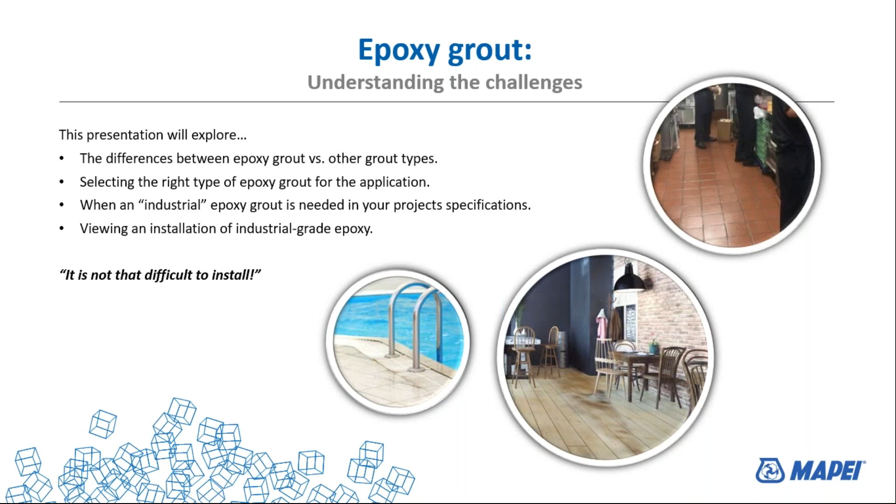And then finally, we're going to be viewing an actual installation of industrial grade epoxy grout, so that you can see it's not that difficult to put in, it's not that difficult to work with, and when it's needed on your job, it should be used on your project.

So let's take a look a little bit at grout itself. What's the purpose of grout? Grout is used primarily to be more sanitary, so we're filling up the joints between the tile, preventing dirt or contamination from getting in between the tiles. It's meant to keep water from going down into the tile installation and underneath the tile. Remember that grout is not waterproof. Even if it's an epoxy, it's not a waterproof grout. Moisture can still seep in through it, but it does help keep water out.

It protects the tile edges. If it's a square edge tile, you're filling up the grout joint completely so that you're not getting chips along the edges. If it's a cushioned edge tile, the grout is at a level where it drops down to the level of the cushion. But basically, it's protecting the edges of the tile.

Grout's used to either contrast or blend with the tile, depending upon the look that the designer is after. Do they want to accent the individual tiles, make them pop and show the difference in color, or do they want more of a monochromatic look and have the grout blend in? With the range of colors now available in grout, you can do either type of application.

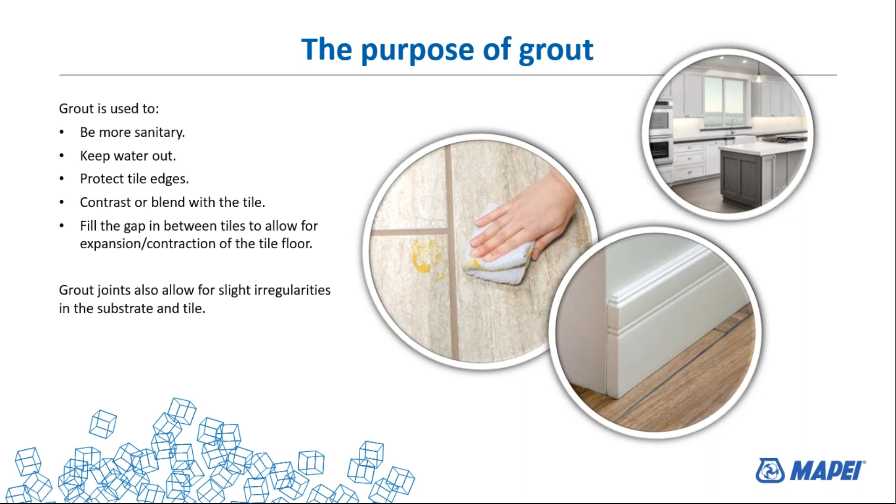It also fills in the gap between the tiles to allow for the expansion and contraction of the tile floor, picking up the movement in that floor. Grout also allows for slight irregularities in the substrate and the tile. So grout is used for correcting a lot of minor imperfections in an installation, hiding maybe some of the variations between the tiles. The grout serves a major purpose in the installation.

So when we're taking a look at types of grouts for ceramic tile, we reference back to the ANSI specifications. Your standard cement grouts meet ANSI 118.6. This is a blend of sand, cement, and aggregates brought together to form a uniform, consistent grout. When I first started in tile installation, a lot of the grout was job site mixed, where we would just take sand, cement, maybe add in some cement coloring and come up with a grout.

Then with the development of other additives into it, moisture retarders into it, it developed into your standard cement grout, which meets ANSI 118.6. In the last number of years, we've gotten into the ANSI specification 118.7, which is your high performance cement grouts. We'll get into a little more definition on these in just a minute, but they perform better than your traditional Portland cement grout. There's a lot of pros to these types of grouts and what they're doing.

Recently, what we've seen on the market is the premixed or ready-to-use grout. This is a type of grout that comes in a bucket. You open it up, it's ready to use. There's different mixtures of it, different ways of putting this type of grout together, which we'll explain in a few minutes. The biggest thing to realize is that currently there are no ANSI standards for these ready-to-use grouts. The industry is currently working on that, and I'm sure shortly we'll be seeing actual standards for these ready-to-use grouts. Industry is moving more and more to this type of a grout.

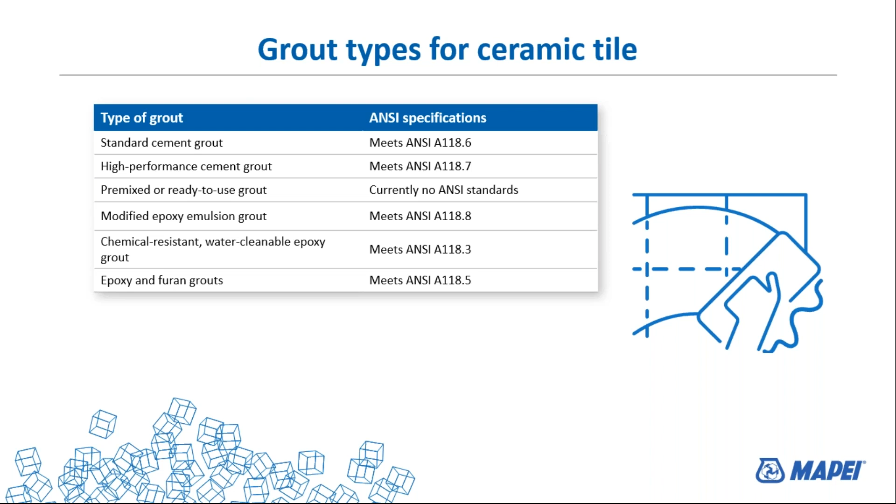So when we take a look at your basic cement grouts for ceramic tile or stone, your ANSI 118.6, the pros on this type of a grout is that it's cost competitive. It's the least expensive grout on the market. You do have a range of colors. Just with MAPEI, we have 40 different colors in this. Our competition has similar numbers of colors, but you find a full range of colors with these types of grouts. They're available both as sanded and unsanded.

Typically, you're going to use an unsanded grout where the joint is up to 1/8 of an inch in width. If it's more than that, we'll go into a sanded grout. Suitable for most applications, except when chemical resistance is needed. Getting into a chemical resistant application, this type of grout won't hold up to it.

The cons on this grout: it is a cement, and as a cement, it is susceptible to shading, discoloration. It can look different depending upon how much water was used to mix it, how much water was used to clean it up. It's very similar to when you take a look at your sidewalk. If you use too much water in a sidewalk mix, the color becomes different than if you're using the proper amounts of water. Similarly, with a Portland cement grout, you can have shading based on how much water is used in mixing and how much water is used in cleaning up.

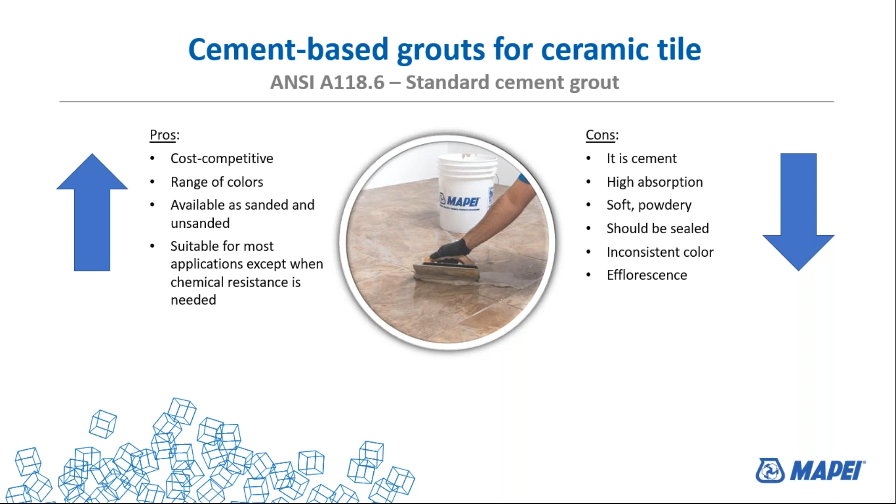The next grout is the ANSI 118.7 cement-based grouts for ceramic tile, or a high-performance cement grout. The pros on this are this is a non-Portland cement grout. It's a calcium aluminate cement. With a calcium aluminate cement, you're using less water, and that means there's less water to be hydrated off or evaporate out. So we end up with a faster setting grout, a denser grout. This grout is typically less than 5% of absorption or porosity.

The joint widths on this type of a grout can be as small as 1/16 of an inch, all the way up to an inch wide. So you're not using both an unsanded and sanded grout. It's one type of grout. So on the distribution side of it or the application side of it, less inventory to be carrying around with you in doing your installation. One bag can go either the tight joint or all the way up into a wider joint.

It is efflorescence resistant. Being a calcium aluminate cement, the way it hydrates out, you're not getting the free lime being pulled to the surface and leaving that white efflorescence residue on the surface of the tile. So when being asked for a recommendation on any type of an exterior application, this for sure is the grout that we would start with and recommend, making sure that you as an applicator, you as an architect, are not ending up with the efflorescence problem at the end of an installation.

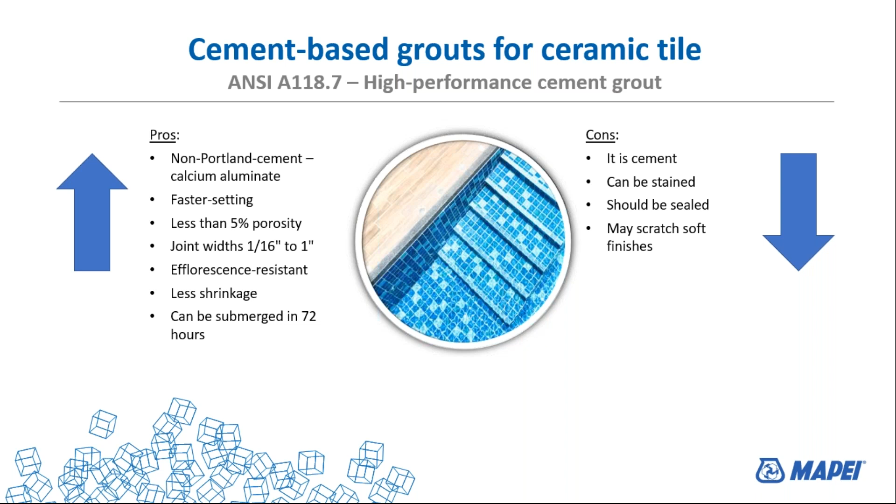And the aggregate on this type of a grout can scratch soft finishes. So if you're using a softer glass tile or a metal finish tile, always do a test area prior to installing this type of grout.

The pre-mixed polymer resin grout is a one-part liquid, ready-to-use grout that requires no mixing with water. The advantage to this is that you open up the bucket, you bring it out and start applying it right away. Cleans up with water. And the other advantage is that any extra on this grout can be put back into the bucket, resealed, and will last up to a year on the shelf.

Recently, I had an opportunity. I was cleaning out some stuff in the garage, and I had a bucket left over from better than a year ago of this type of grout. Opened it up and found that it was still completely usable, and it was over a year old. But we say a year shelf life after it's been opened.

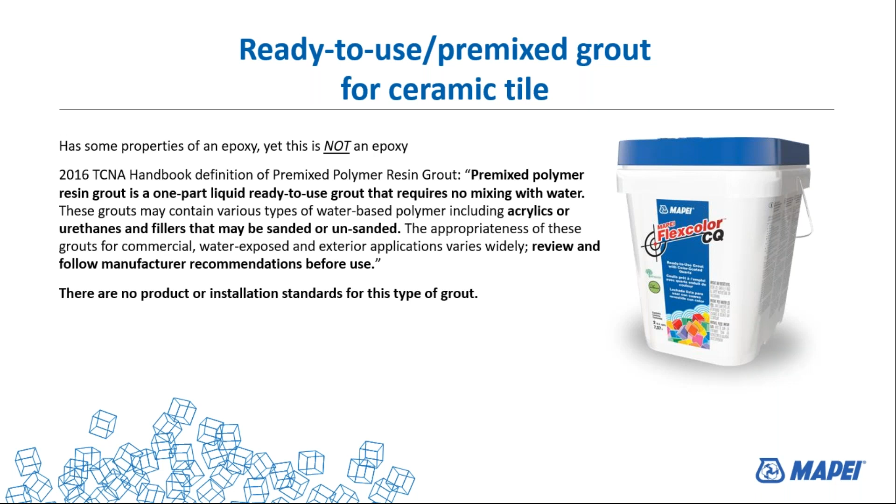We'll also remember that there are no installation standards or ANSI standards on this type of grout. So as a design professional, if you're looking at including this in your spec and you're looking for ANSI standards, at this point, not yet. Soon to come, though.

And we take a look at the pros on the ready to use. No mixing, so we can get it out of the bucket and start installing it right away. It's dust free, so you're not adding a bag of powder into water and spinning it and having dust going across the air. The container can be resealed. It will fill into joints from as small as 1/16 of an inch all the way up to 1/2 inch. Will produce no efflorescence because it doesn't have any cement in it.

It's flexible and crack resistant, and no sealing ever. The sealers just don't stick to it. The cons on this type of grout, it does have limited chemical resistance. So be careful that if you're looking for a grout for stronger chemical resistance, this is not the grout to be going to. It will hold up to the Coca-Cola, the coffee spills. It will even stand up to using it in a restroom and urine and that type of issues.

Cannot be submerged. This is not to be used in a pool, a fountain, or submerged in water. So we often get the question, what about using it outside? Well, be thinking about it. Is this going to be used on an area where water might be ending up standing on it because of not proper slope, or snow or ice might accumulate on it? That would be a submerge. So before you get into using it outside, think about where you would be using it before you specify it in that application.

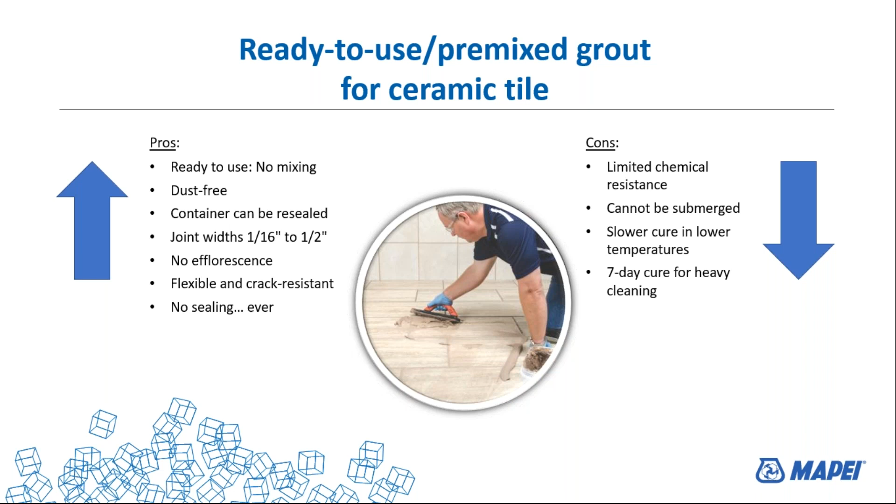And we start looking at the epoxy-based grout for ceramic tile. One of the first epoxy grouts that I used years ago was these modified epoxy grouts. They comply with ANSI 118.8, modified epoxy emulsion. It's used both as a grout and a mortar. The other epoxy-based grouts are 118.3, your chemically resistant water cleanable tile, both setting material and grout. And then our ANSI standard for the installation is 108.6.

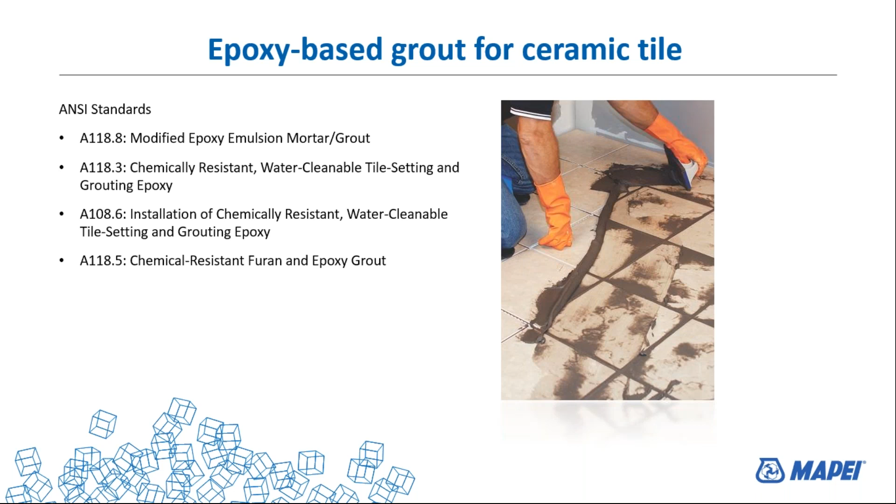And then finally, the chemical resistant, highly chemical resistant, like a furan or epoxy grout, is 118.5. And we're going to look at some differences in these when we're talking about epoxy grout, so you know what you're getting into when you're looking for an epoxy grout.

On an epoxy-based grout, the 118.8, the modified emulsion, it primarily consists of emulsified epoxy resins and hardeners, and it's mixed with a pre-blended Portland cement and silica sand. So you still have Portland cement going into this product. These materials contain raw ingredients that will dissipate as the mixture cures. Therefore, they are not 100% solid. It's not 100% solid epoxy.

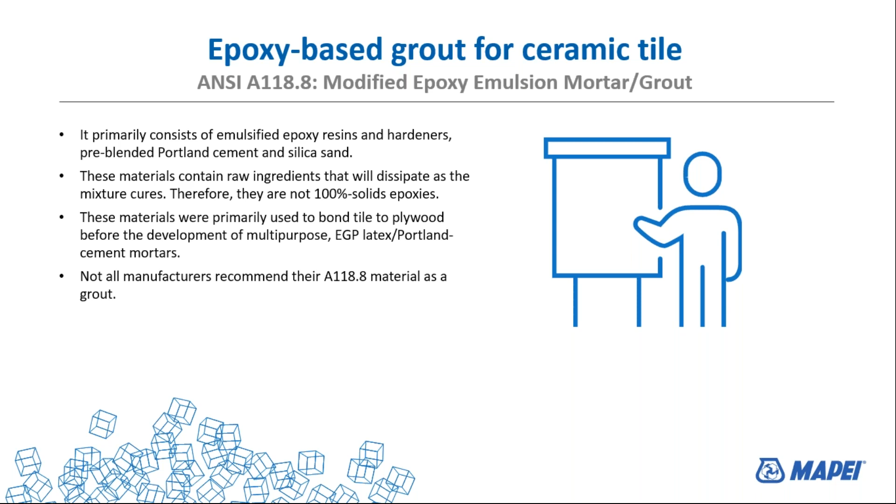These materials, when first introduced, were primarily used to bond tile to plywood before the better development of polymer-modified, latex-modified Portland cement mortar. But what we were seeing is as tile was being installed with wood, they were using these modified epoxy mortars, and then they were also used as a grout. But keep in mind that since there is a cement in this, certain things that will attack a cement will attack this grout also.

Finally, get into our epoxy-based grouts for ceramic tile, the ANSI 118.3, chemically resistant, water cleanable, can be used both as tile setting and grouting epoxy. It is 100% epoxy composition, 100% solids, composed of an epoxy resin, an epoxy hardener, and a powder that contains an aggregate. These grouts can be supplied in 2-part or 3-part combinations, so you're mixing various components together.

The important thing about mixing these is make sure you're mixing the full units. Don't play chemist on the job. Don't be going, oh, I only need a small amount, so I'll pre-measure out an amount and this will work. These epoxy grouts are pre-packaged, giving you the right combinations of liquids and powders and hardeners to be mixed together to form a solid epoxy grout. If you start playing scientist or chemist on the job and mixing partial amounts, typically there'll be a failure because you're not getting enough resin in it, enough hardener in it, it doesn't set up right, and it's a failure.

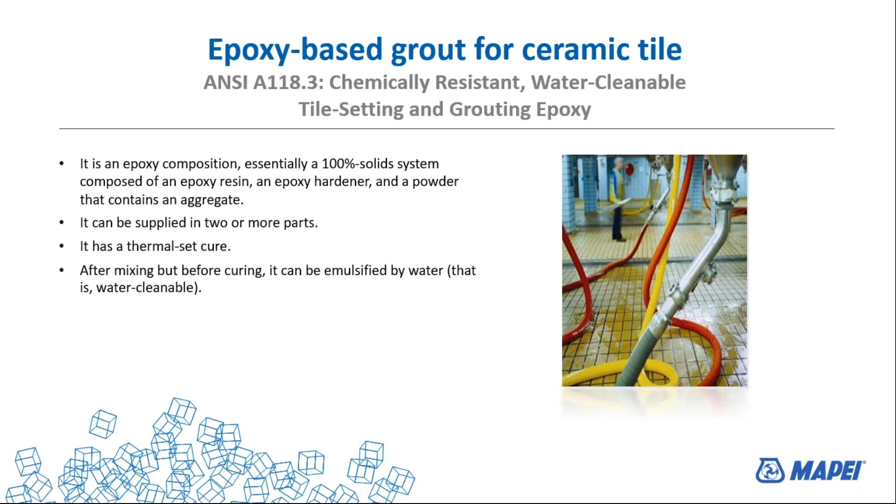Again, when we talk about 100% solids epoxies, early formulas were difficult to use, as I explained. A lot of the times you'd wax tiles to make it easier to clean off with steam cleaning, or you needed to use hot water to clean it up. So you were heating water on the job site to make it easier to clean up. The earlier formulas had very few colors to choose from, very limited.

It was used primarily on commercial or industrial applications where chemical resistance was needed. The one advantage, it's highly resistant to chemicals and staining, so for meat processing plants, cheese factories, food prep areas, epoxy was the way to go. And newer formulas being developed have become a lot more user-friendly and easier to clean.

In a lot of the epoxies, there's not a pigment in the grout. In our Kerapoxy CQ, it's a coated quartz where the aggregate itself is the color. And so that makes it a lot easier to clean up, and you're not leaving a residual of color behind. I know that years ago, working with a black epoxy grout was very difficult because it seemed like you were just constantly smearing black. But now with the coated quartz type of aggregate, it's very easy to clean up and not leave black residue behind if you're using a dark grout.

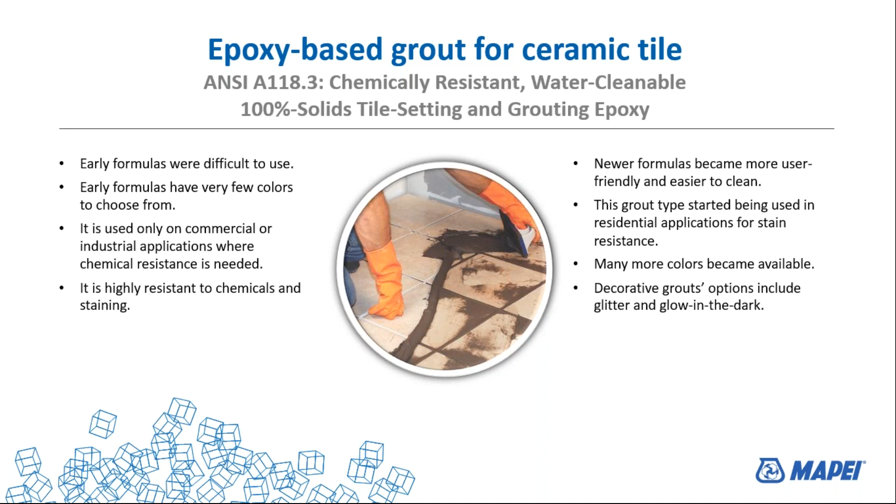There's a lot more colors that are available in the MAPEI line. All 40 of our standard colors are also made in our regular epoxy grouts. Then what we started seeing is that with decorative grouts, there's a lot of options that are starting to be included, including glitter and glow-in-the-dark types of epoxy grouts.

Common uses of epoxy grouts: the industrial grade grout is used in areas vulnerable to maintenance with enzymatic or no rinse cleaners. This is an important point to keep into consideration. A number of years ago, we started seeing some problems that epoxy grout was disappearing, was being eaten away, and in researching what was going on, we found that enzymatic cleaners or no rinse cleaners were being used on floors.

If you've ever worked in a kitchen and had to mop up a floor at the end of the evening, these enzymatic no rinse cleaners are ideal. You could get the floor clean, get out of your cleaning a lot quicker. The next day you come in and the floor was ready to go nice and clean.

What the industry didn't realize when they introduced these cleaners is that these cleaners, in combination with certain fats and acids, form what's called an oleic acid, which can be very caustic, eating up a traditional epoxy grout, and destroy a cement grout very, very quickly. Olive oil and chicken fat are two of the items that are most prevalent; mixed with these enzymatic cleaners, they form this oleic acid and attack a traditional epoxy grout.

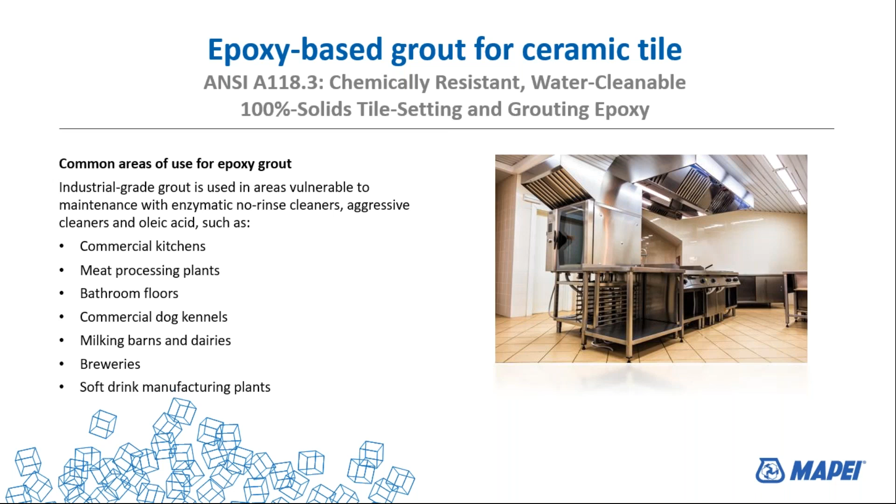And this is where we so often run into problems where the installer says it's so difficult to work with. We want to use a regular epoxy or a standard cement grout. You don't need that because it's so much harder to install. And this is what we're going to be showing you in a minute, that it's not that difficult.

This is kind of a little bit of a repeat of what I was just saying. Standard epoxy grouts were susceptible to deterioration from enzymatic no-rinse cleaners. The newer industrial grades were developed to cope with these harsh chemical environments.

Industrial grade grouts are tested in accordance with ASTM C267, and each manufacturer has a list of chemicals showing their grout's degree of resistance. So as you're looking at calling out that industrial grade of grout for the back of the house kitchen, for a processing plant, take a look at what that grout will stand up to. And all of the manufacturers of these industrial grade grouts have attested to showing you what you're actually getting.

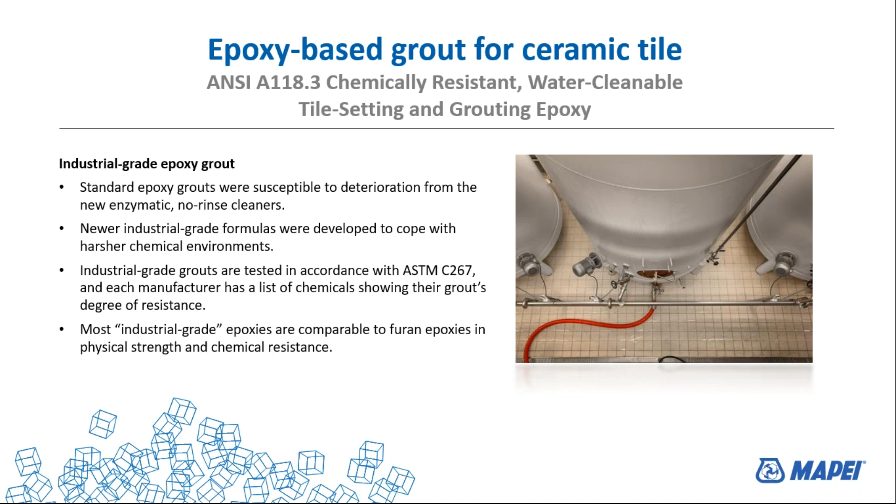Most industrial grade epoxies are comparable to furan epoxies in physical strength and chemical resistance. Furan is still on the market. You're seeing less and less of it being used because these industrial grade epoxy grouts have become easier to install than the furan grouts.

So pros on an epoxy-based grout: no sealers, less costly in the maintenance. So yes, the installation cost might be more, the materials might cost more, but the ROI for your end user is going to pay for itself in the lessening of maintenance with these types of grouts. Excellent chemical resistant, color consistent, and stain resistant. Of course, you won't get any efflorescence with it because there's no cement in it.

Can be used for both walls and floors, and the ability to work with it is greatly improved, a lot easier to work with. Cons: yes, you are mixing 2 or 3 parts that need to be mixed together, and they need to be mixed together accurately to make sure that this grout sets up properly. It is a chemical reaction, so when they're saying mix all of part A with all of part B and add in the powder, follow that explicitly to make sure that it sets up properly and works properly.

Shorter working time with these types of grouts, getting it out of the bucket, spreading it onto the floor. You're not going to spread as much of an area before you start washing. Cleanup can take a little more time. It is more expensive for both material and labor, and it should be done by an experienced installer. Somebody saying, "Oh, I've done grout, I can put in epoxy." No, they need to have some training with it, working with it to understand what's involved in getting it out of the bucket, spread, and cleaned up so that there isn't a problem after the installation.

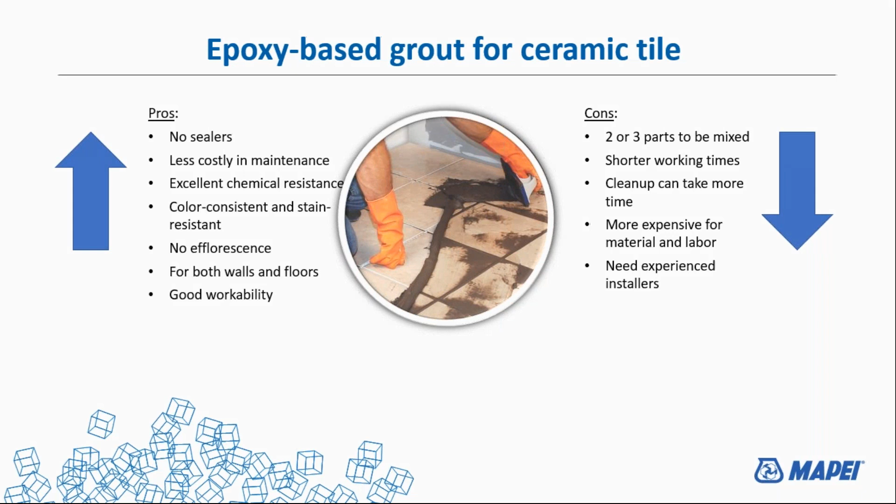We're going to go into a short little video showing how epoxy grout can be installed. This is a quick 7-minute video to give you a good understanding of the industrial grade of epoxy grout, showing it being installed on an actual kitchen floor.

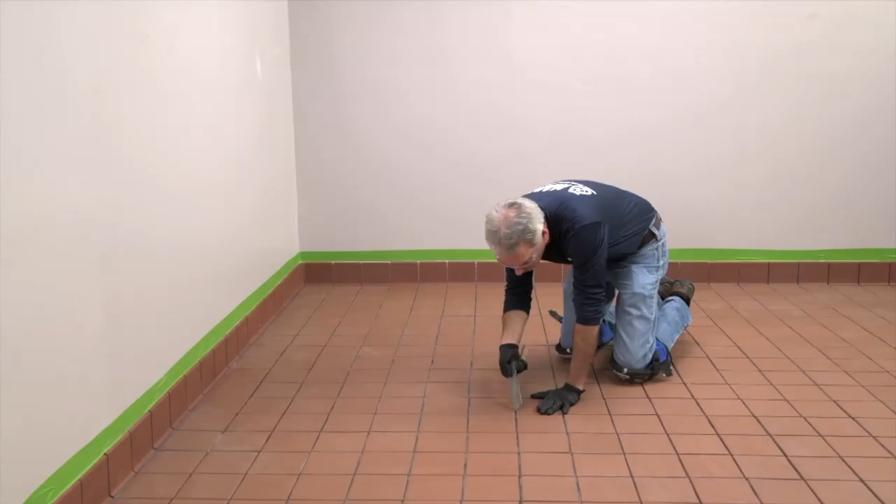This video will focus on MAPEI's Carapoxy IEG CQ installation techniques for quarry tile in a commercial kitchen. The Carapoxy IEG CQ kit includes all of the components listed here. It can yield up to 4 gallons of grout. Carapoxy IEG CQ is made of a Part A resin, a Part B hardener, and a Part C colored quartz aggregate. All 3 parts are required. Be sure that the grout joints are clean and that 2/3 of the total joint depth is free of mortar, per the ANSI A108.6 installation procedure for epoxies.

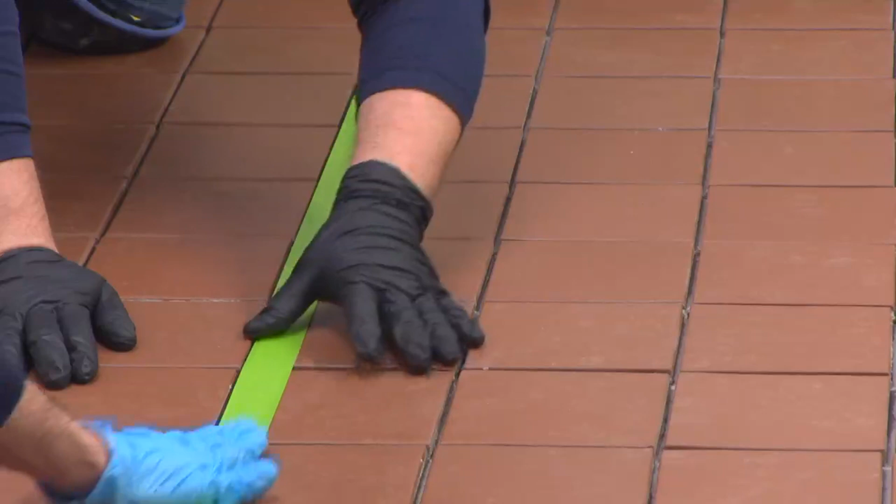Insert a foam backer rod into the expansion joint between the cove base and the floor, per ANSI and TCNA standards. This will protect the joint from being filled with grout. Tape off the section of floor on which you will be working. This way you will know which grout joints are clean and which are not. It is important when working with Carapoxy IEG CQ that you do not mix partial units. To avoid a possible skin reaction, wear proper personal protective equipment.

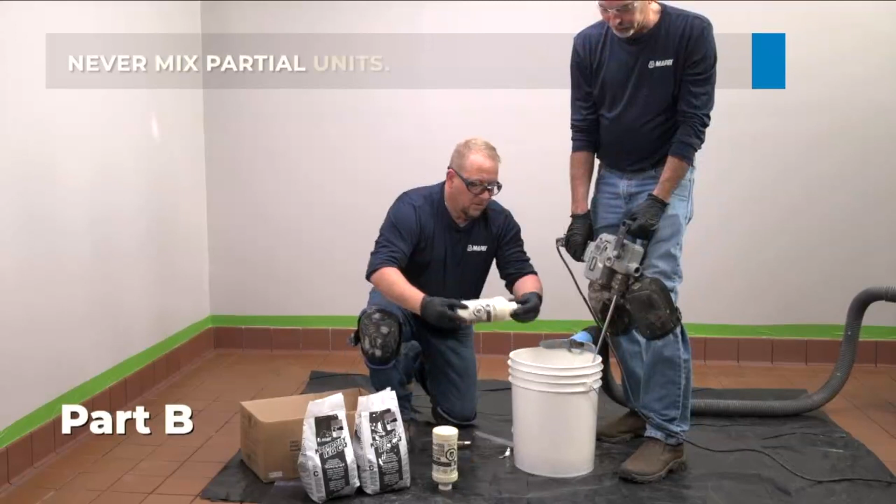First, mix Part A and Part B in a mixing bucket with a 300 RPM mixer. Mix entire units at a time. When the color is consistent, slowly add Part C. Mix thoroughly until a homogeneous, consistent color is achieved. Avoid prolonged mixing, which can trap air and shorten the pot life. Once Carapoxy IEG CQ is completely mixed, it must be installed within 1 hour maximum, or the product will not properly install. To lengthen the working time in hot weather, keep parts A and B on ice for 15 minutes before mixing. Set the mixing bucket in a cold water bath.

If UltraCare Grout Release is not used, dampen the tiles before installation, but tiles should not be so wet as to have pooled water. When you're grouting more than 500 square feet, it's best to use a two-man team. This allows you to mix more units of parts A, B, and C at a time. If you are a single installer, we recommend mixing 1 unit of parts A, B, and C at a time. For typical tiles measuring 6 by 6 by 1/2 with a 1/4 inch joint width, the coverage for 1 mixed unit of Carapoxy IEG CQ would be about 40 square feet.

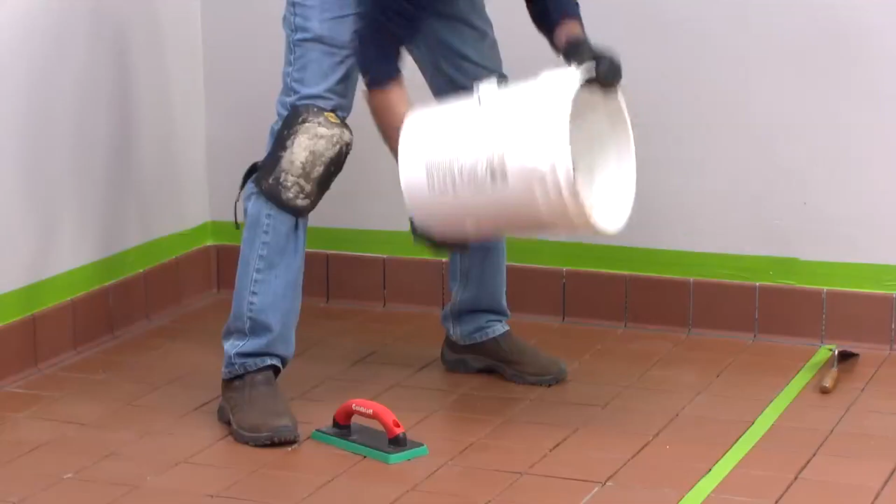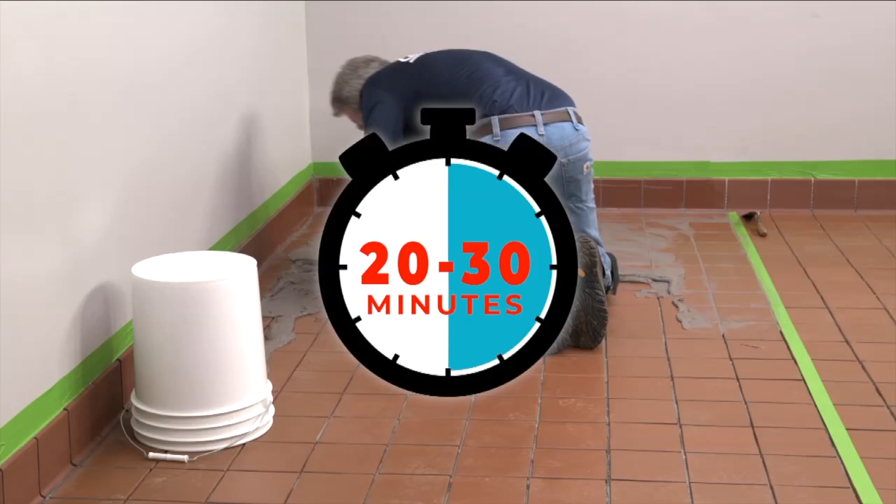Remove mixed product from the container, pouring it in a ribbon or placing it in small piles on the tile surface. Kerapoxy IEG CQ is a thermosetting product, so it sets up faster in a container or in a large mass. A two-man team may mix 2 or 3 units of parts A, B, and C and grout 80 to 120 square feet at a time. A single installer may mix 1 unit of parts A, B, and C at a time to cover about 40 square feet. Whether working alone or in a team, this process should take 20 to 30 minutes. Always use directional floating. This means holding the float at a 90-degree angle to the floor and pulling the grout at a 45-degree angle to the face of the tile.

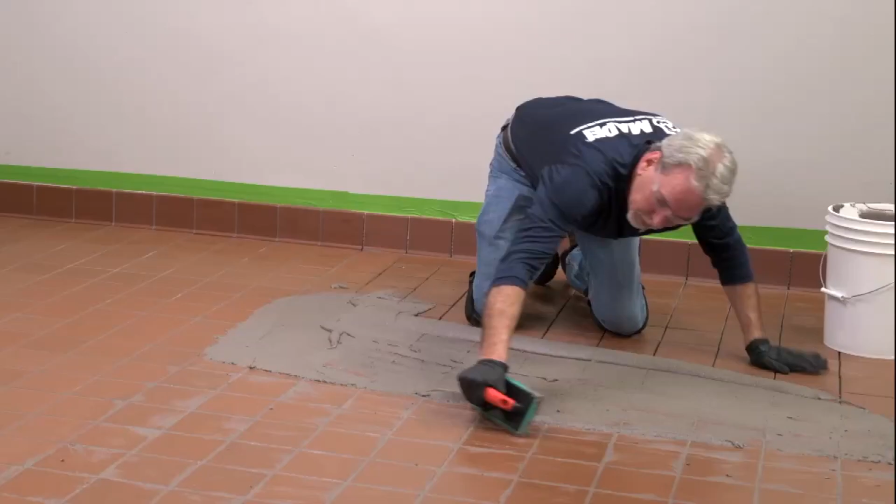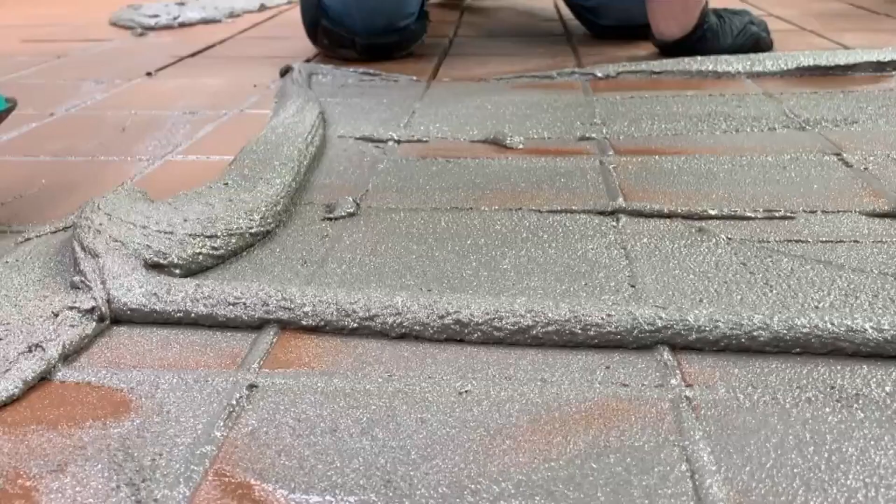Use a hard rubber epoxy float with a sharp edge to continuously force grout into the joints. Make sure that all joints are well compacted and are free of voids and gaps. Fill joints with the maximum amount of grout possible. Before the excess epoxy begins to set, remove it from the tile surface with the edge of the float, holding the float at a 90-degree angle and pulling it diagonally at a 45-degree angle across the joints. Grout joints should look full and flush to the top of the tile surface.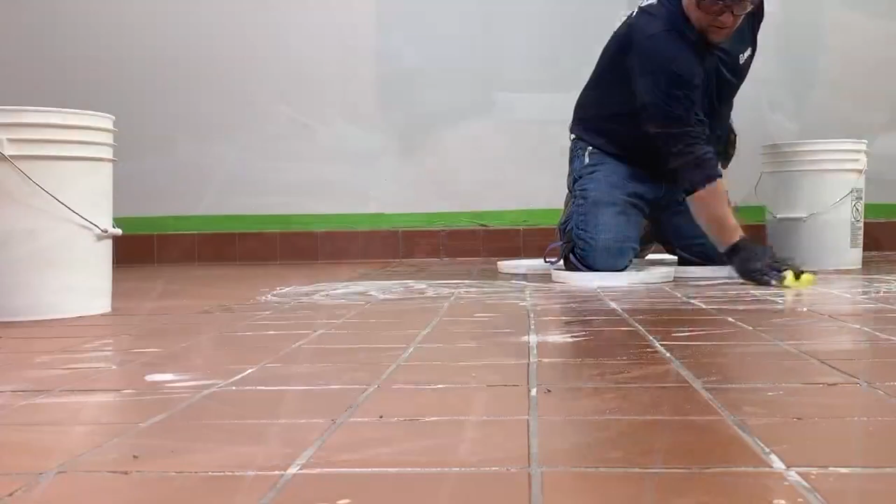For the initial cleaning, dilute each initial wash cleaning additive packet from the kit with 2 gallons or 7.57 liters of clean water. Liberally spread the cleaning mixture onto the grouted area and scrub with a white nylon scrub pad from the kit, using circular motions to remove the grout from the tile surface. Then remove the wash water by dragging a sponge from the kit diagonally across the joints, flipping to the sponge's other side after each pass. Rinse the sponge after both sides are used for a pass. Be sure to change the water in the buckets after using each unit for grouting.

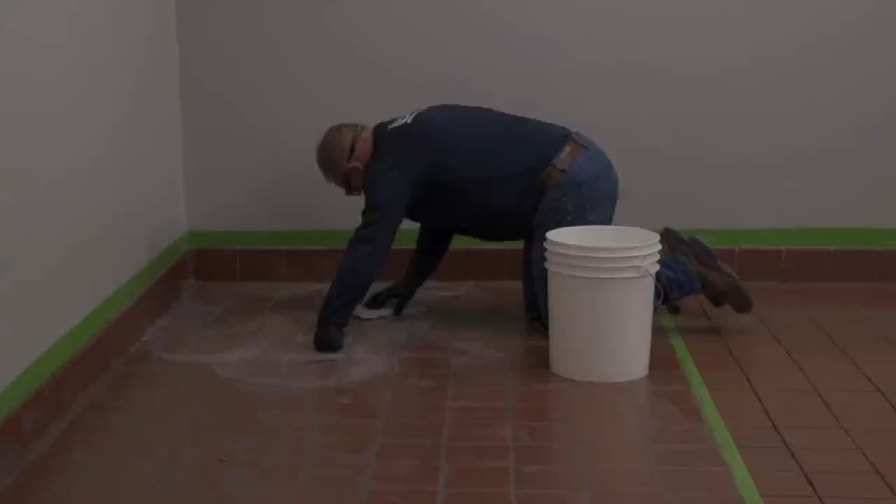Do not leave any standing water on the tile surface or in the joints, because this can cause epoxy residue or grout haze. Knee pads and toes of shoes can press on newly installed joints, causing the grout to bulge and indent. Unfortunately, these indents don't always appear right away because during the cleaning process they fill with soft residue. This soft debris breaks free after the grout is hardened and suddenly an indent appears. For this reason, we recommend the use of a knee board or even a 5-gallon plastic lid to protect the grouted joints and prevent indentations.

Work in smaller sections to clean grout from the tile surface before it dries. Always use clean water. Change the water every 40 square feet and be sure to keep the water out of the ungrouted grout joints. If water does get into the empty joints, use a shop vacuum to remove it. After the initial cleaning, wait 5 to 10 minutes.

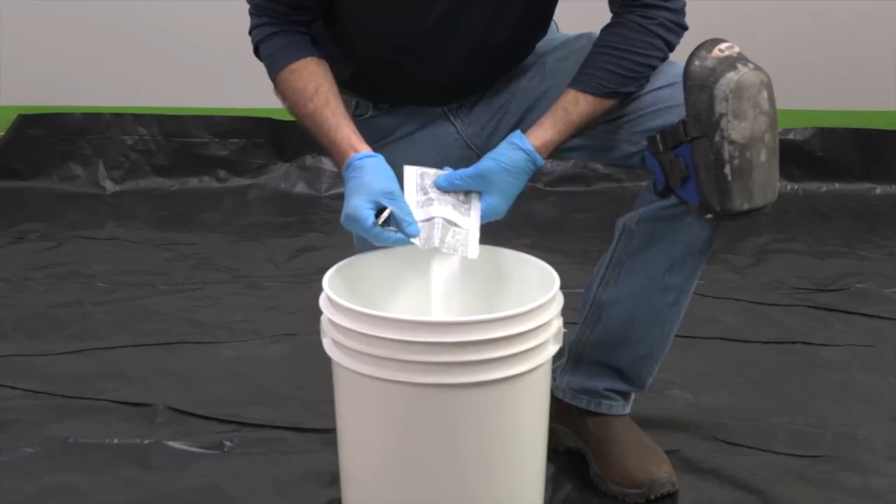Now begin the final cleaning of the floor. Dilute each final wash cleaning additive packet from the kit with 2 gallons or 7.57 liters of clean water. Liberally spread the cleaning mixture onto the grouted area and scrub with a new white nylon scrub pad from the kit, using circular motions to remove the grout residue.

Use a clean sponge included in the kit and pull it diagonally across the floor to remove any remaining grout haze or residue. Use a clean, wet microfiber or cotton towel and pull it diagonally across the tile to remove any excess water. Again, leave no standing water on the tile surface or in the grout joints to prevent epoxy residue and grout haze. The entire process of installing the Kerapoxy IEG CQ kit from start to finish should take no more than 45 minutes to 1 hour.

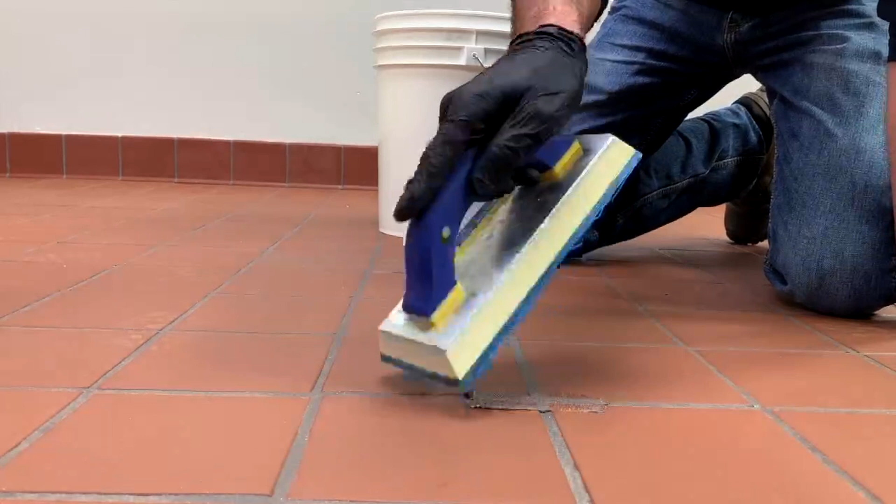Once the surface is dry and before it is covered, check for haze or imperfections. The epoxy resin will bond to itself, so repairs are relatively easy and will blend into the joint. Following the previously detailed steps, mix a kit and trowel grout onto any spots in need of repair. If grout is applied, clean floor as previously detailed. Remove any haze with MAPEI's Ultra Care Epoxy Grout Haze Remover.

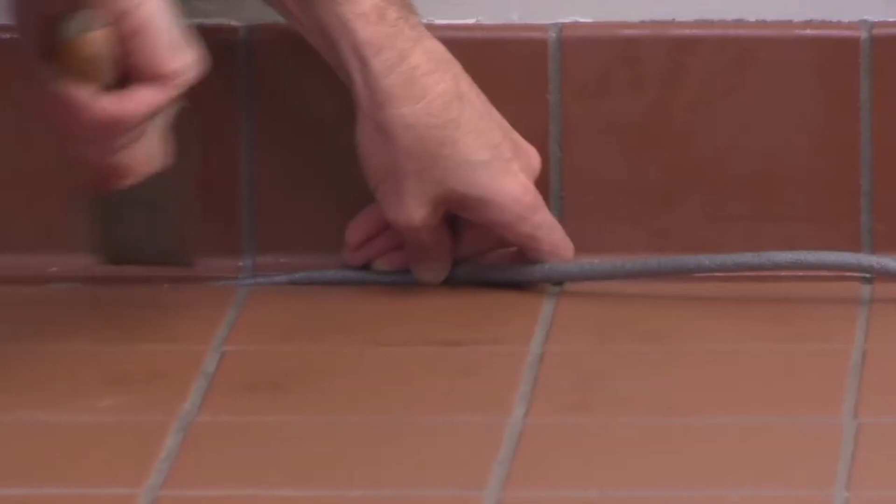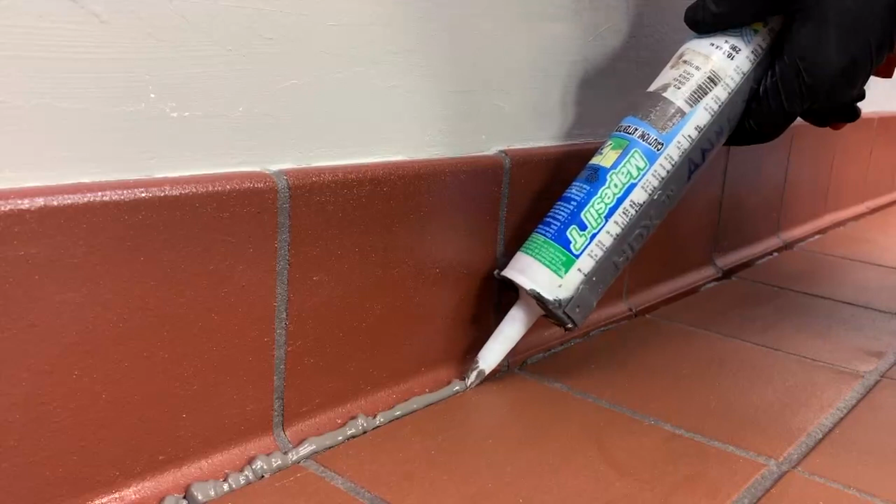Remove grouted backer rod from cove base and install fresh backer rod per ANSI and TCNA standards. This will create a two-sided bond and prevent the sealant from tearing as the floor moves through its normal cycle of expansion and contraction. Install MAPEI's Mapesil T 100% silicone sealant to the expansion joint running around the floor's perimeter between the cove base and the floor. Spraying the sealant with water diluted with a small amount of dish soap will help prevent sticking to your tool.

If possible, wait at least 4 hours before covering the grouted area. If you must cover it to protect it, use kraft paper or ram board. And finally, protect the tiles and prevent foot traffic for 24 hours during curing.